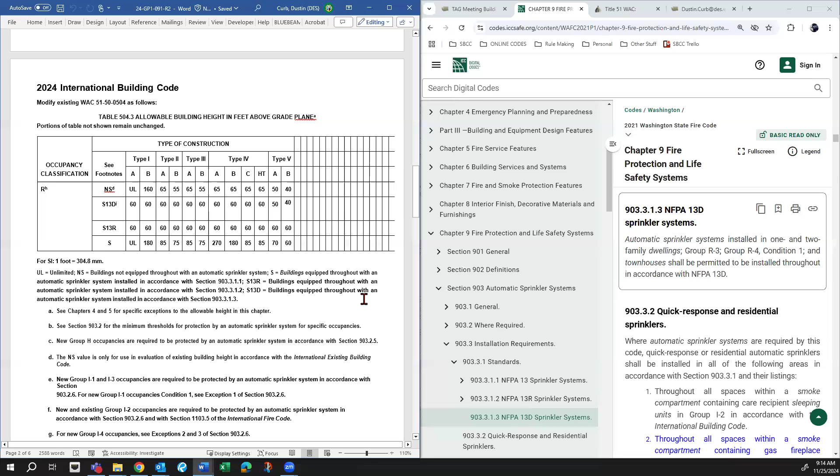Gotcha. Jeff, you said you had some other comments on other portions of this proposal? Yeah, if you go back to the story table, as I've mentioned to this group and other groups in Washington, I have a proposal to do something similar that accomplishes the same end in the IBC for the upcoming cycle. It would have been heard this year, but it got moved to Group B, so that proposal is in.

One of the things I note here is if you go to R3, you're adding that new footnote under 13D. It should be moved over, I think, to the 3-story lines instead of putting it on the heading. Then under R2, the 13D, you're letting 13D systems go to 4 stories, but 13R and 13 systems are limited to 3. That makes absolutely no sense, so all of those 3s need to become 4s.

Because you don't want to give more height allowance to 13D. I will point out that in my proposal, I did not include R2s, I only did R3s in the national code. I'm a little concerned that R2 might be too generous for this, but that was Ken's proposal. In no case should you be allowing a 13D protected building to be higher than 13R or 13.

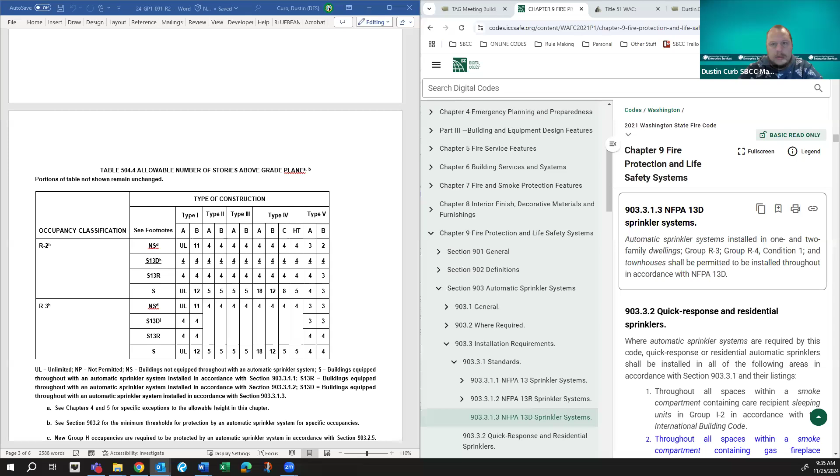Jeff, you should have this in your inbox now. I sent it out here at 9:24. Let me just double check that I don't have anything waiting in my outbox. Yep, I see it just popped in.

So you're going to go on to other things. Let me play with this. I'll email it back to you and then I'll tune back in. It shouldn't take me more than 15 minutes.

So with that one, we're going to table 091 revision 2 until we get back from Jeff with some revisions. I guess the plan will be to review the revisions, hopefully make a recommendation, and before that runs back to the fire tag and IBC tag, I'd like Ken to put his blessing on it as well. So I'll send that out to him, and we'll keep everybody tuned on what the outcome is for that one. So we'll table 091 for now.

Dustin, this is Sean Shepherd. I expect Ken will have some time to be available this week. Okay, all right, so with that one, let me close down 091.

And minimize that. So our next one is number 117. We looked at this last week too, but I don't have a good note on what is actually needed to be done on number 117. I just have that it needed to come back with a revision here.

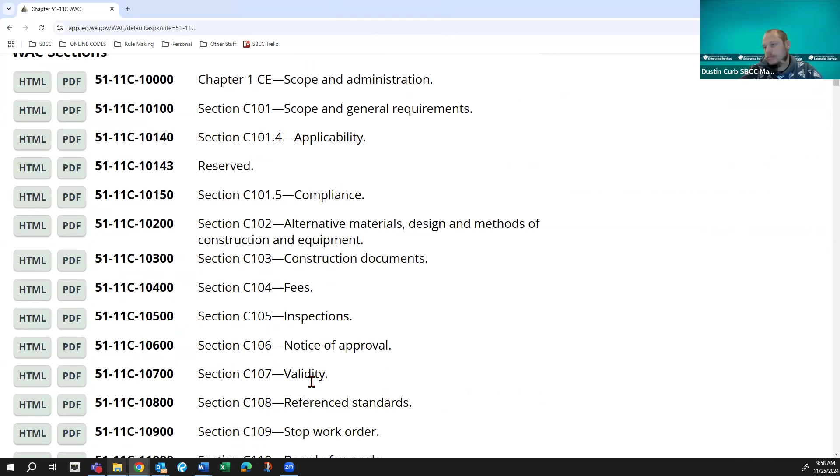Nobody has brought that particular point up before, Quinn. Go to scope and general requirements, or C101, yeah. The code shall be known as the Washington State Energy Code.

So let's see. So the title of the WAC is the adoption and amendment of the 2021 International Energy Conservation Code. In here, in the scope and general requirements, they name the code as the Washington State Energy Code.

If we get back into, say, let's look at what the state building code is. We have 003, the International Building Code. So, I guess only in the energy codes are they renaming the title of the code to be the Washington State Energy Code in the WAC.

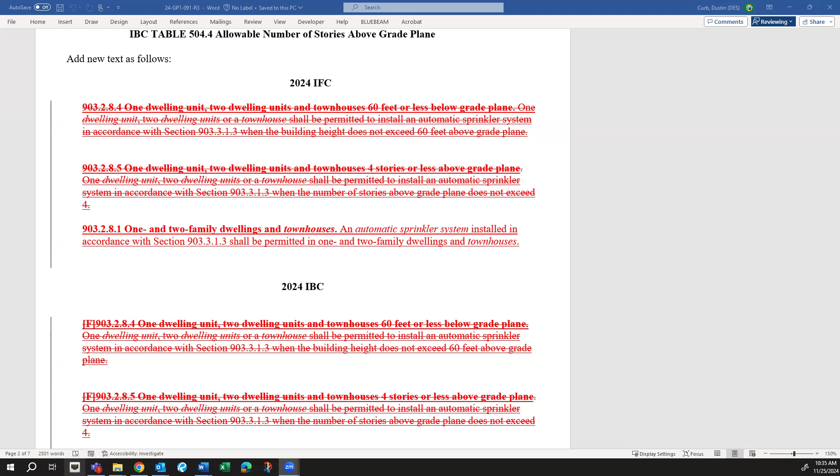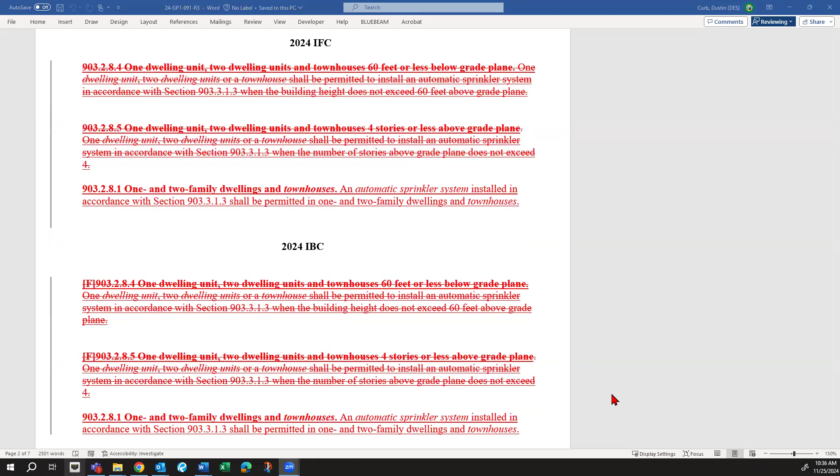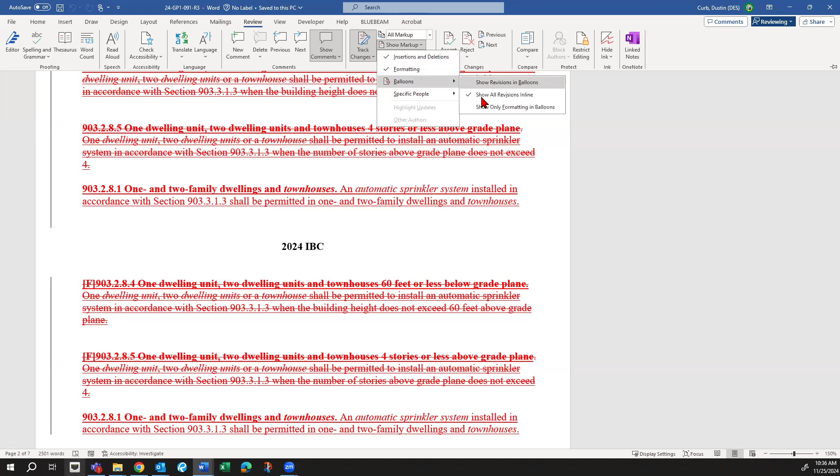So the original text of 903.2.8.1 is for R3 occupancies, and I thought that I had that in here. If you change your review settings to view everything in line, that might show up at the top where it says review, then show markup, and then under balloons, everything in line. It's already checked, okay, sorry about that.

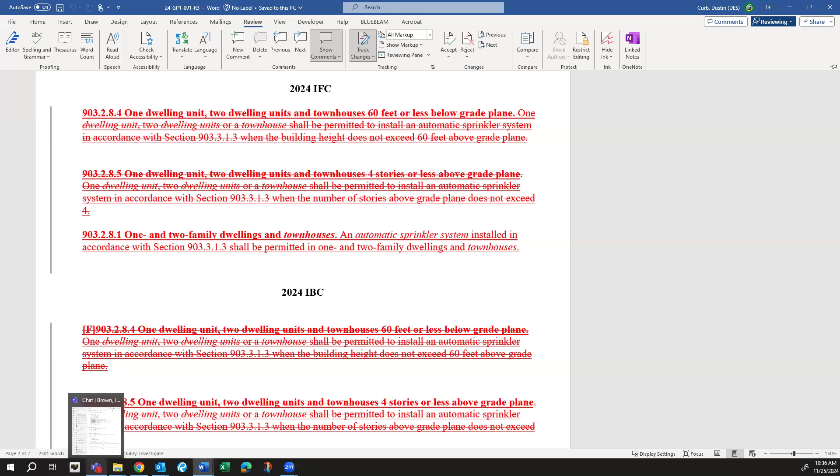The original 903.2.8.1 basically said that sprinkler systems in R3 occupancies can be in accordance with 313, which is 13D systems. To get rid of the issue of occupancy classification: 1 and 2 family dwellings are always going to be R3. Townhouses, again, we have this discussion of is it R2 or R3? Doesn't matter if I use the word townhouse, that's defined in the IBC as 3 or more dwelling units, and that's all we need. So for 1 and 2 family dwellings and 3 or more dwelling units, the sprinkler system can be installed in accordance with 313, which is 13D.

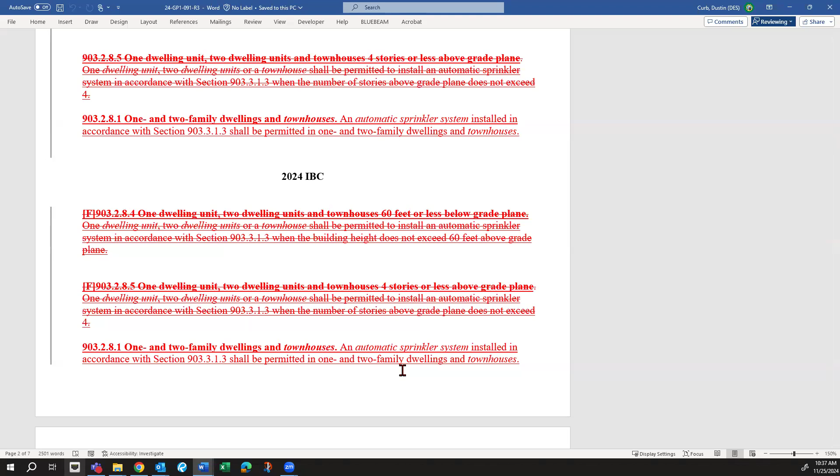That totally eliminates the discussion of what's the occupancy classification and uses the existing 903.2.8.1 rather than adding two more subsections. I honestly did not feel the need to pick up on 60 feet or the 4 stories because that's handled by the tables. So to me, this is sufficient.

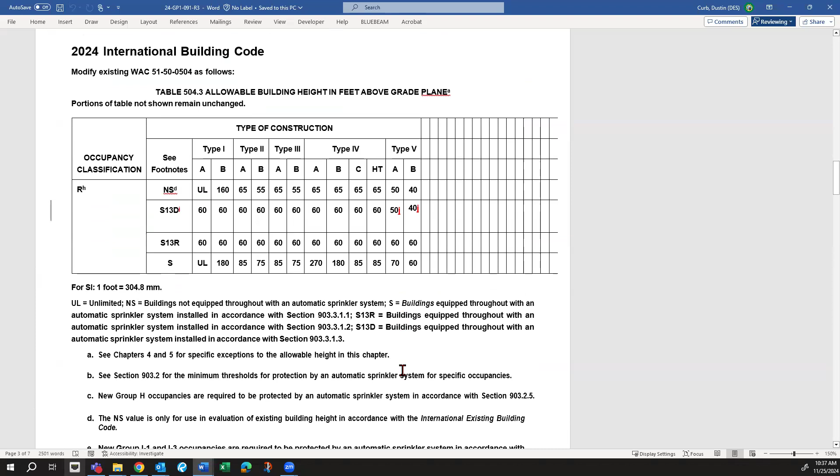In the first table, I made sure to add the new footnote J, which I modified what he had to an A and B construction because you don't want B to be more generous than A. And again, I got rid of the 1 dwelling unit, 2 dwelling units, or townhouse, and just called it 1 and 2 family dwellings, and townhouses that are group R can go to 60 feet if they're 5A or 5B.

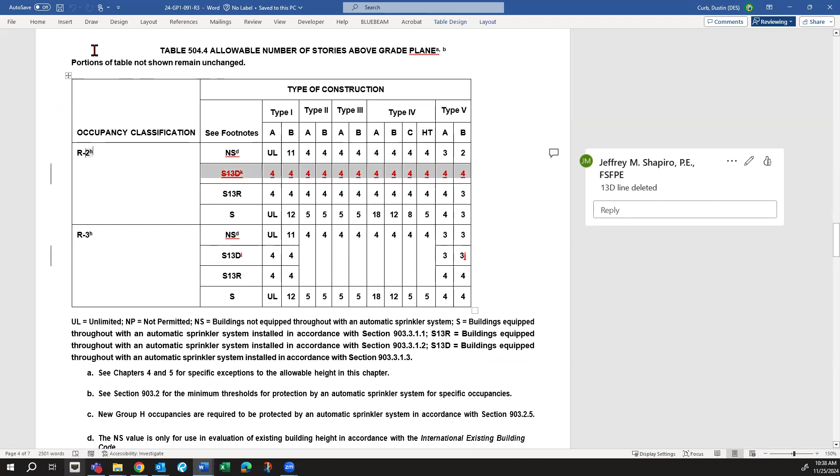And the next table, as I said, I got rid of, and I'm just to make sure it's clear that that's stricken. The whole 13D line is stricken. And then footnote H, as it exists today, if you go to, I did what I could to highlight that, but it wouldn't do it. If you go to footnote H, it says new group R occupancies are protected in accordance with 903.2.8, and that is the 2.8.1 that I just amended that says 1 and 2 family dwellings and townhouses.

So I don't even need to say anything under R2 because the existing footnote H that's there already points you to 903.2.8 and will say 1 and 2 family dwellings and townhouses can be done in accordance with 13D. I did the same change for the new footnote J, which is for number of stories. And again, I added that footnote J to 5A and 5B construction so that both of those can go to 4 stories, which is currently 13R.

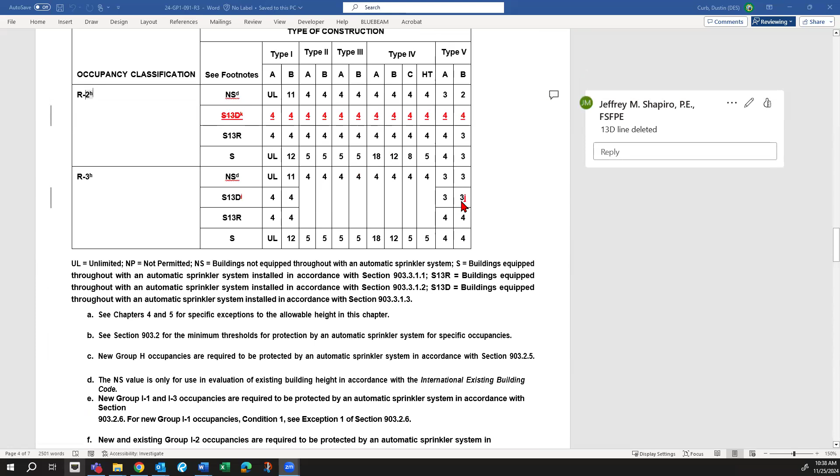Yeah, let's see. Did I miss that under? Can you go back there again? I could have sworn I added that. Okay, my bad. It should be next to the other 3 for 5A construction. Right here. Yeah, I could have sworn I typed that, but I think I may have hit undo for something and it went 1 level too far.

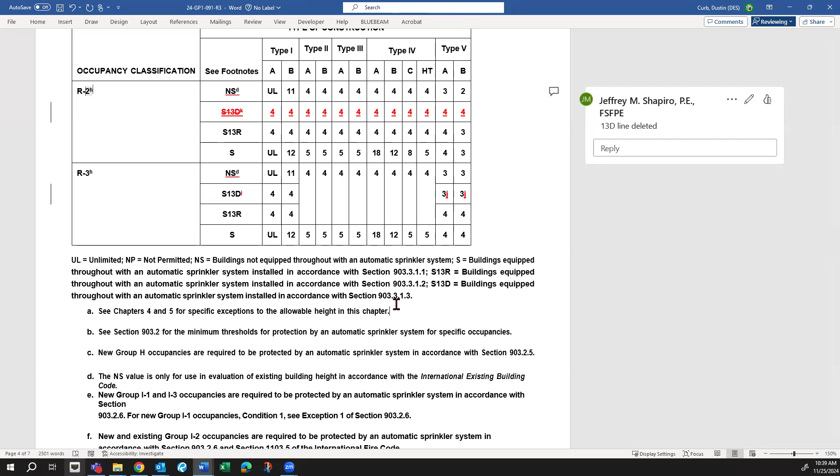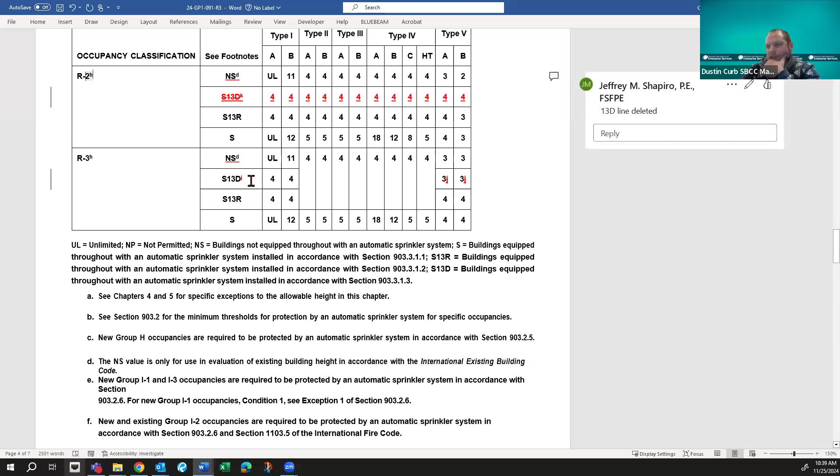Yeah, because you don't want a 5A construction building to be more restrictive than 5B. So it lets both of those go to the 4 stories. And then I think I deleted the other one there at the beginning of the line. I think that's stricken on after 13D. Yeah, it looks like it's got a strikeout through it. Okay. Yeah. So I moved it to the 3 instead of putting it at the beginning of the line because it makes more sense at the 3.

All right. The last thing I did is something that actually just came up a few days ago that I wasn't aware of, but there's a jurisdiction in Texas that was looking at doing exactly this, and they had elevators in the building, residential elevator. And if you read 713.4, a residential elevator in a dwelling unit is technically in a shaft, and that shaft enclosure at 4 stories is technically 2 hours. Why you got those, I don't know. I fixed those before I sent it, and they undid.

Anyway, so I'm actually looking at, and I'm kind of in trouble in the IBC process because Chapter 7 was fire safety. It was in Group A, and I can't tinker with this. So I'm going to try to find a way probably to put it into the elevator chapter and then let the Code Correlation Committee move this in if they decide to.

But you don't require enclosure of anything in 5B construction in a residential unit. And 5A is 1 hour, but it's 1 hour throughout. So I missed, sorry, it should be shafts in 1 and 2 family dwellings and townhouses of type 5B construction. I don't know, I must have sent you a different, one of the versions that I was working on, but it should say townhouses of type 5B construction shall not be required to have, because 5A is going to be 1 hour throughout. I mean, I would, frankly, 5A, I would do it 1 hour throughout anyway, because that's the general requirement, and this wouldn't get rid of that.